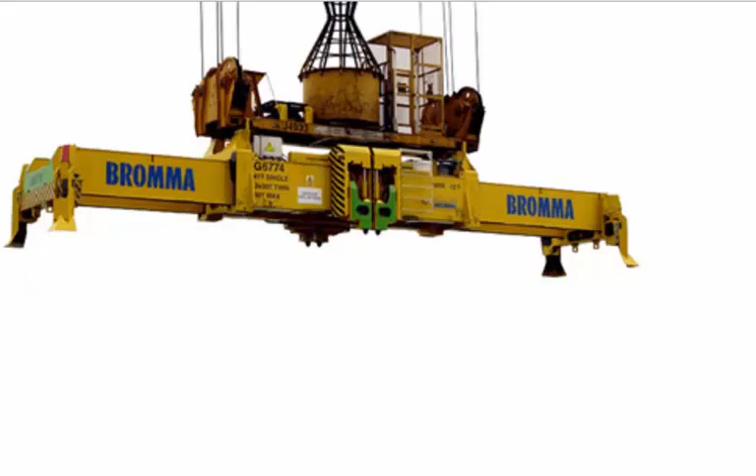Hi friends, today we will see some information about spreaders.

Have you seen cranes in the ports lifting heavy containers, and how do they accomplish this feat? They use something called spreaders. What you see in the picture is a Bromma spreader. So let's see how it works.

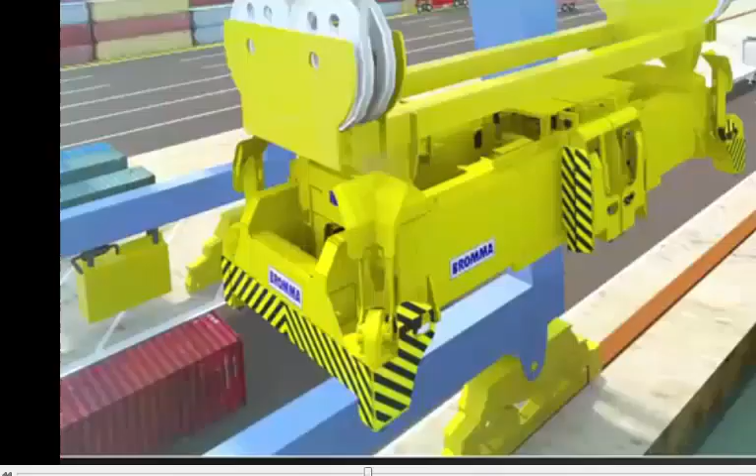I have taken the liberty of using a Bromma video. It's just a blank video, it doesn't contain any audio, so I was using a voiceover narration to explain how it works.

The thing which came down is a flipper. It is used to position the spreader over the container.

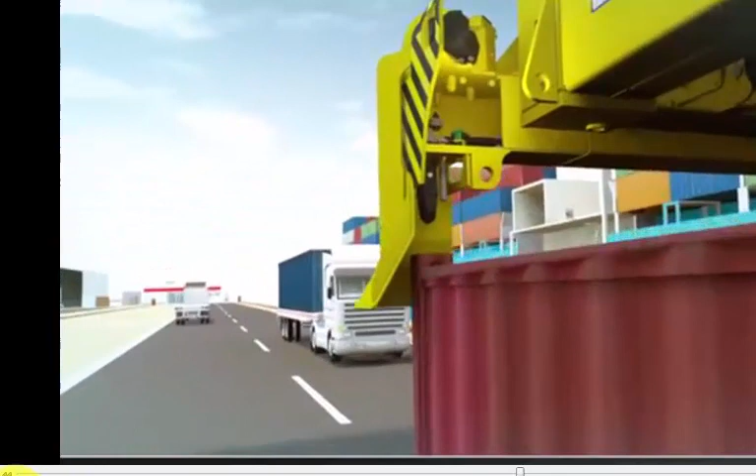So it goes down, positions itself, and it lands on it. Before it lands, you can see the twist lock. It enters the hole provided in the container.

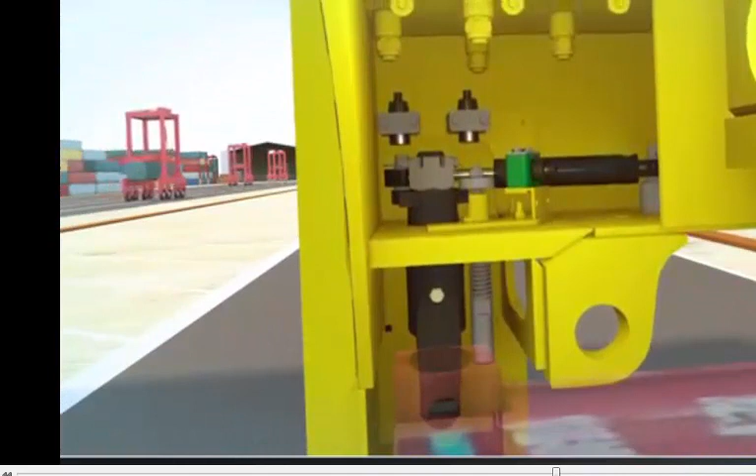So that is the twist lock going inside the container, and simultaneously there is a stopper which comes up. You can see the stopper. The function of the stopper is to prevent the twist lock from twisting.

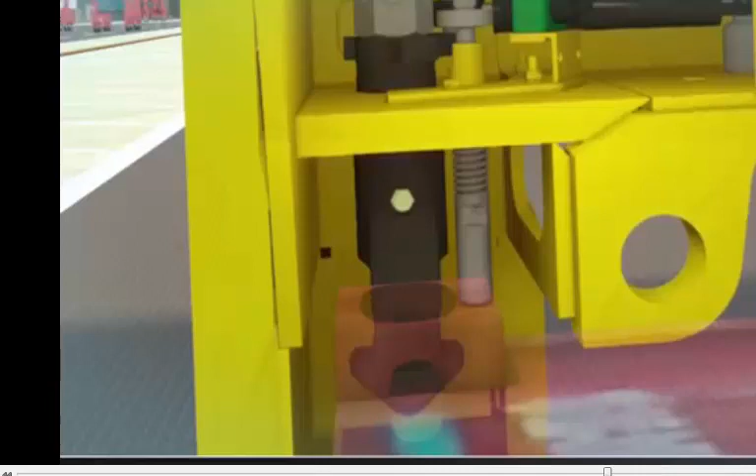Once the twist lock gets in, you can see this one rising, and the twist lock locks into position. Once the crane lifts the container, it's locked now. So even if the operator accidentally gives a signal to unlock the container, it doesn't happen.

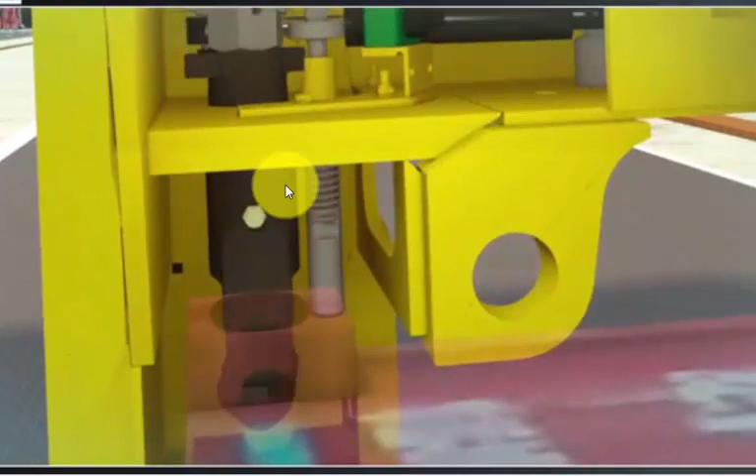Let us have a close-up shot of this. Now the spreader lands on the container. Once it lands on the container, you can see the landing pin touches the container and it starts to rise. The spreader sinks in, the landing pin rises, and it allows the twist lock to turn. Now it is turned and it is locked.

So when it rises, it lifts the container with it.

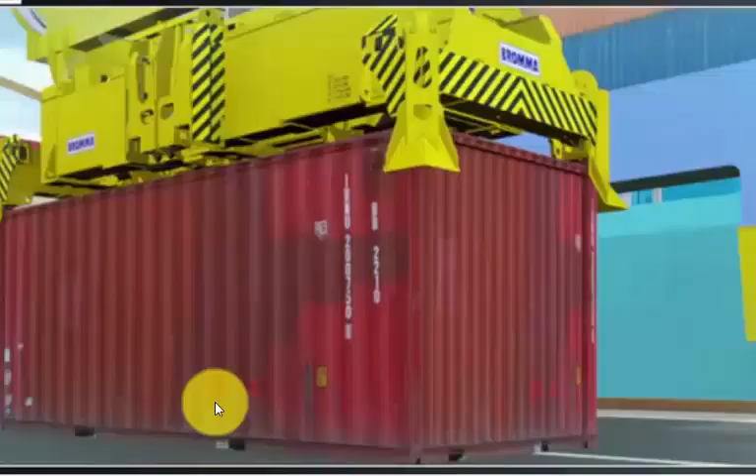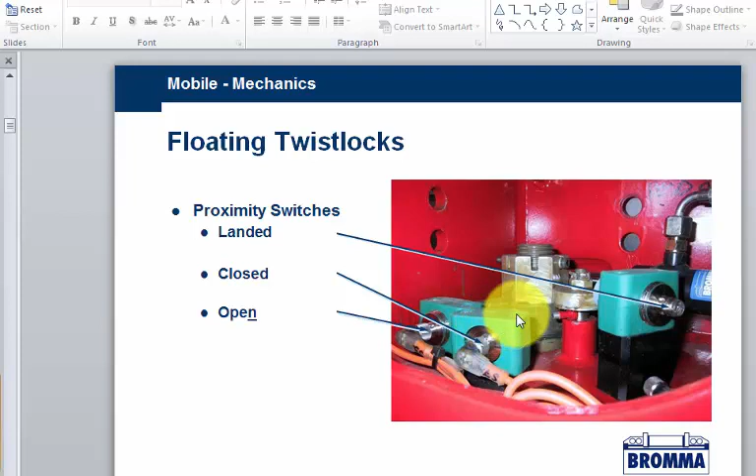Another picture, you can see the proximity switches. These switches turn on the LED light. It will signal the operator whether it is properly landed or not. So you can see the twist lock here.

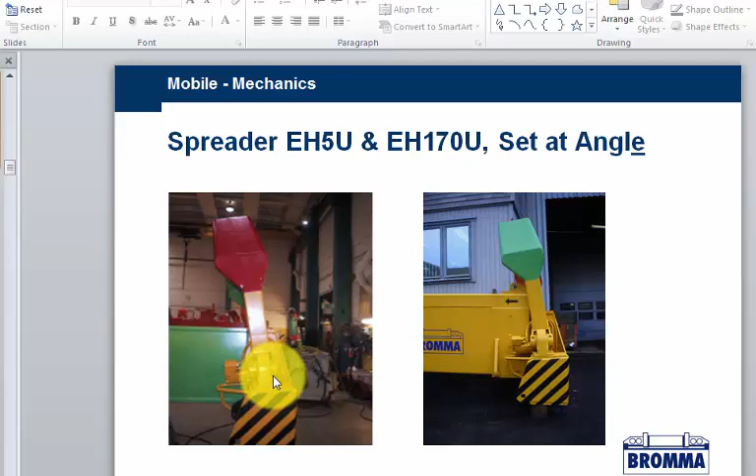So these are the flippers, and the flippers are controlled by a hydraulic motor. So you can have a closer look of this hydraulic motor.

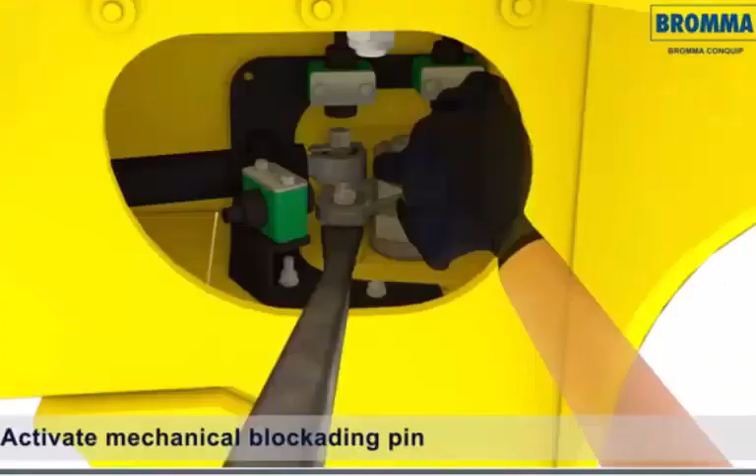So this is another video of how to remove the twist lock. If we have to remove the twist lock, we have to lift that landing pin with a pry bar. Here it shows they are lifting the landing pin with a pry bar, and they have placed a screw.

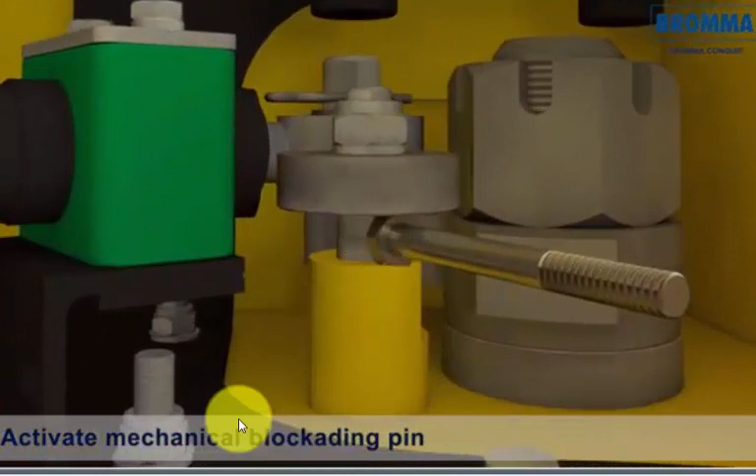In between, this way they can turn the twist lock.

You can see this picture.

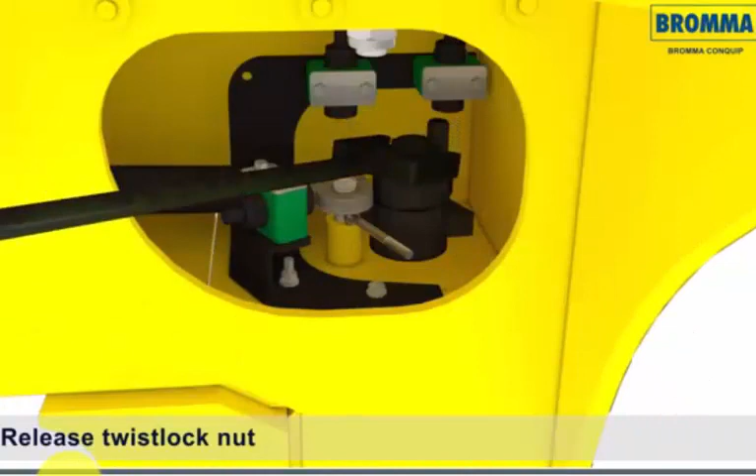There are a host of other features about the spreader, but one video is too short to explain everything. So let us see in another video. Thank you guys.